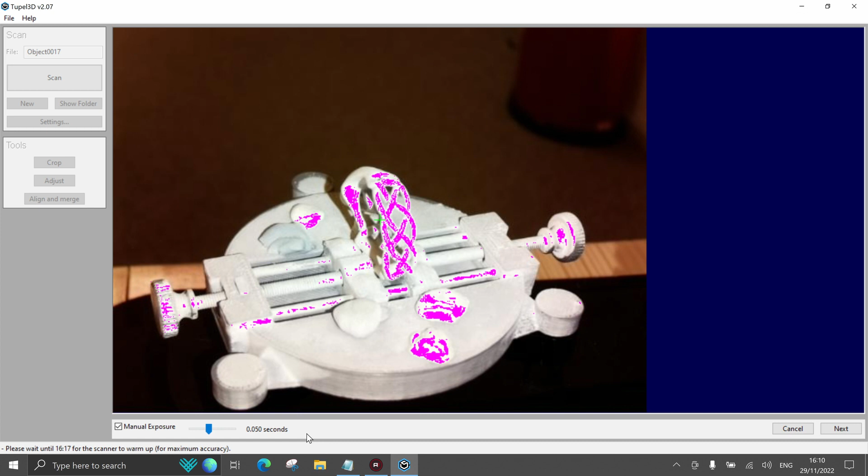So as you see, there's a lot of purple-red color, which indicates that you've brought the brightness too high. So using the arrow up and down on the keyboard, or with the mouse, you can bring your brightness down. You try to achieve the maximum brightness possible, but without noise.

So if you leave it like this, everything that's purple around won't be fully scanned, so you try to adjust it.

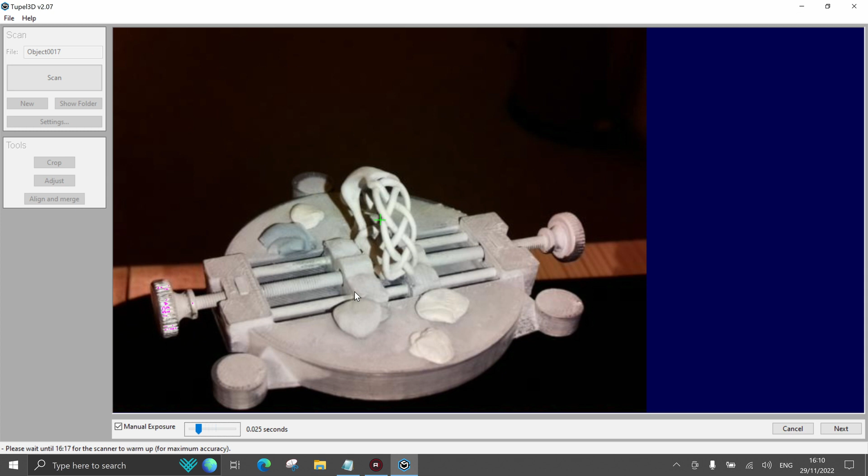Now you can rotate it the same way. You can check if you sprayed your ring well, so we can see it's all nice, and then you press next, and we're going to wait for the scanning process. It takes about 4 or 5 minutes.

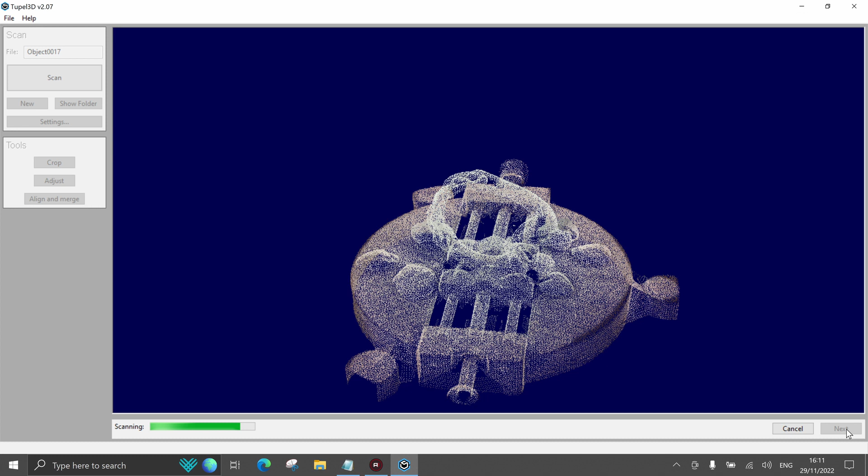So now, as you see, the scan was done pretty fast. While it's processing, you can already rotate the ring to the other side and prepare for scanning the other side.

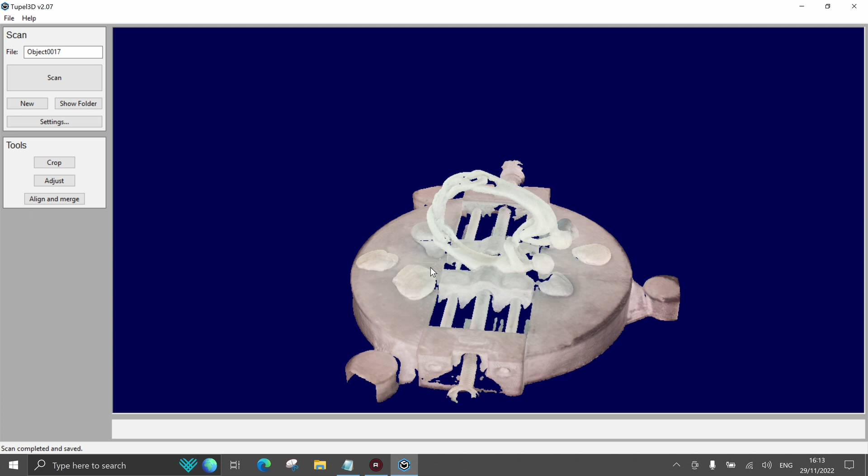So after you scan your object, you need to go to crop. You have two options: keep selection or remove selection. I'm going to use remove selection for our purpose, because for this interesting shape of ring, it's good to keep most of the data, so I'll try to keep this part as well.

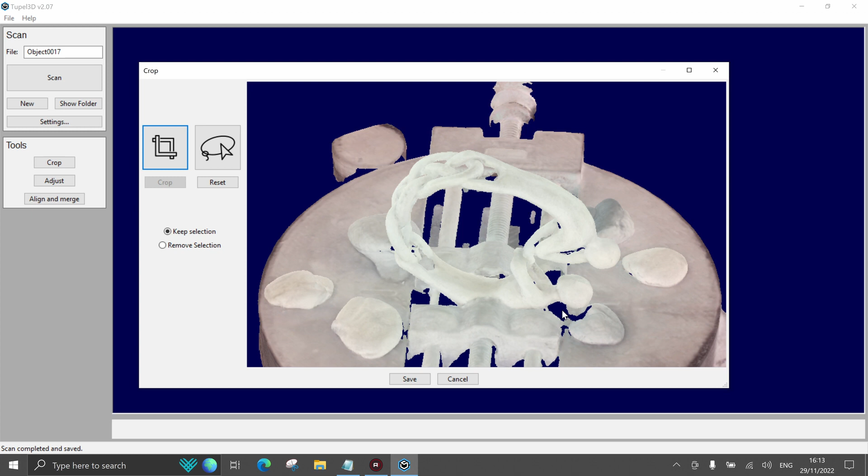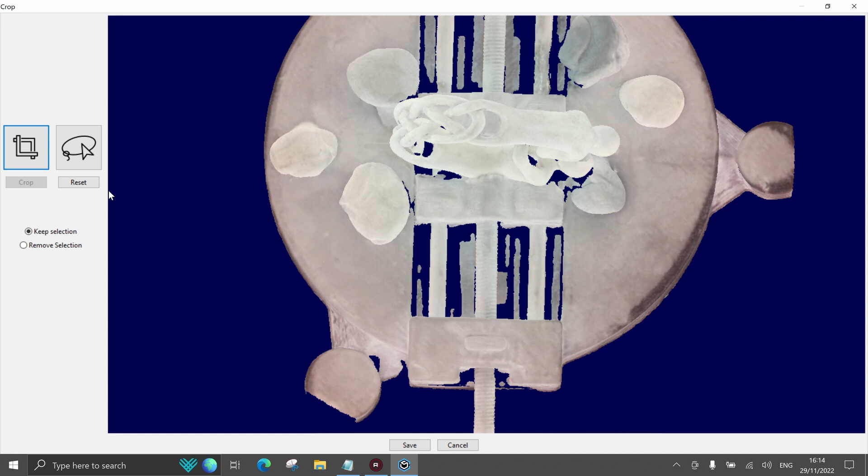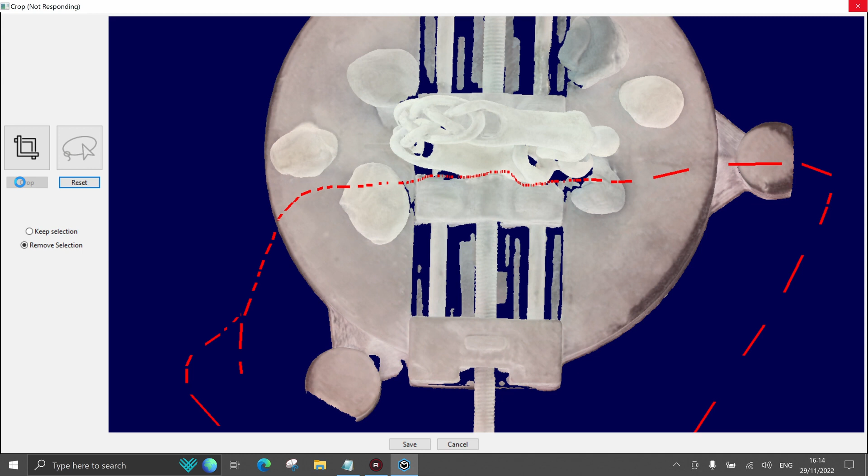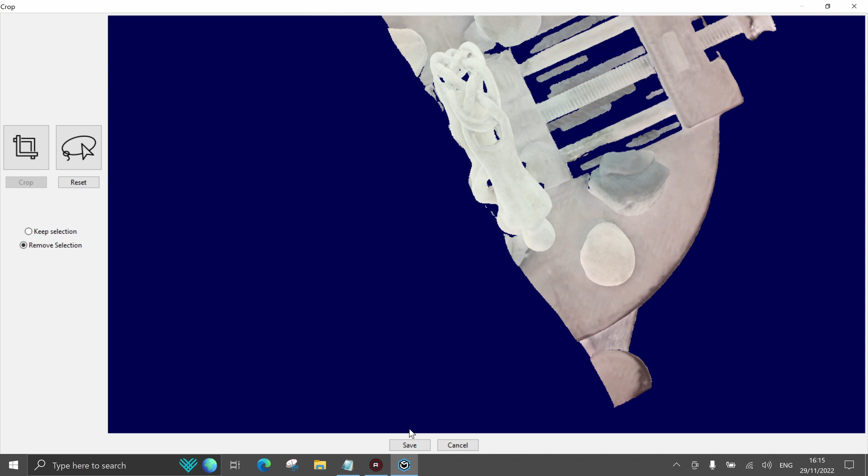It sometimes happens, like now, that part of the window disappears during processing. We're dealing with a small error, but this screen is here, so it's enough to click on any white window here, and you'll have your scan back.

So we're doing exactly the same with the second part: remove selection, highlight, going around here, and crop.

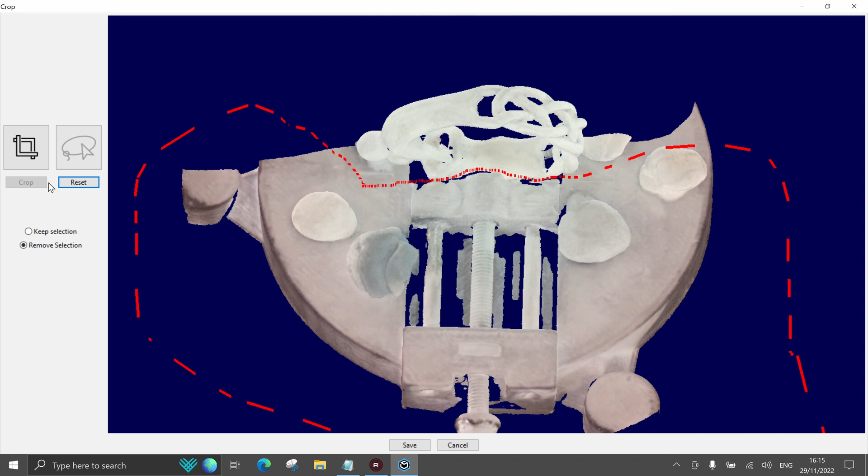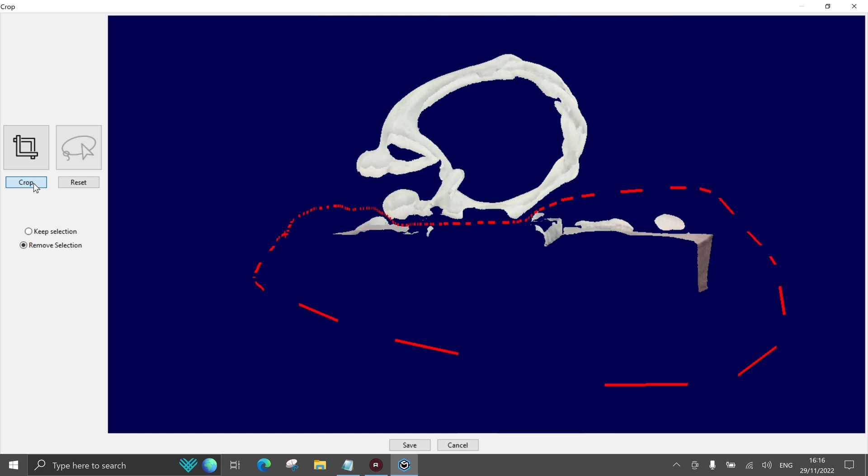We have a lovely scan, press save. In post-processing, I recommend sometimes there's a little bit of floating noise in here, so you adjust the floating noise removal. Just press apply, and all the small noise around the scan is going to disappear. Then you press save, and one part of the scan is ready.

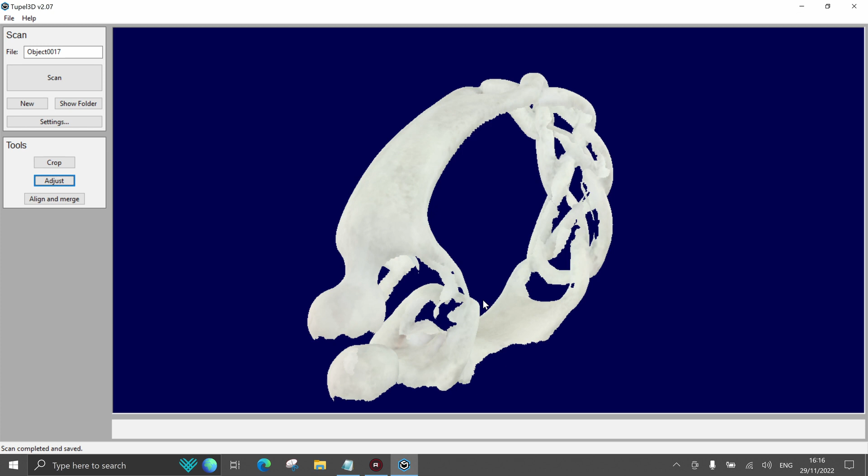So for the second part, we just rotate the scanner and do exactly the same. When it's ready, we're going to align and merge, and you add the second scan. I've already rescanned the second one, so we can continue.

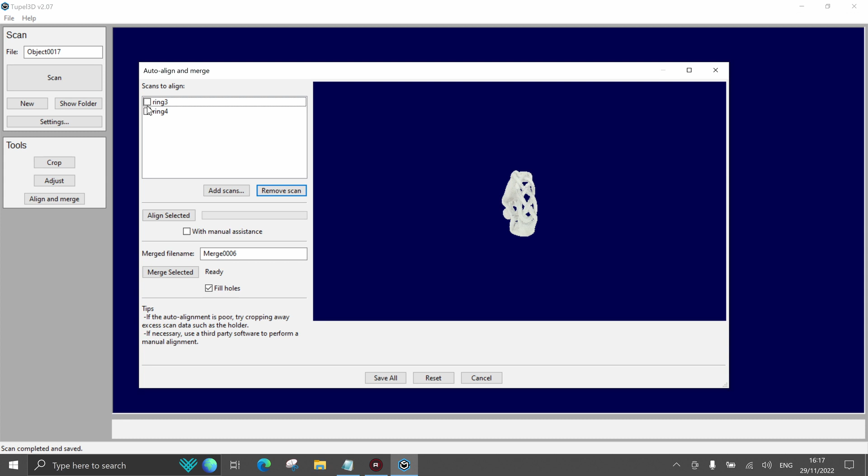Wait a few seconds. Like you see, it's aligned the ring. You can also make this screen bigger. So the alignment is done pretty well, the most important thing is that one shape is close to the other.

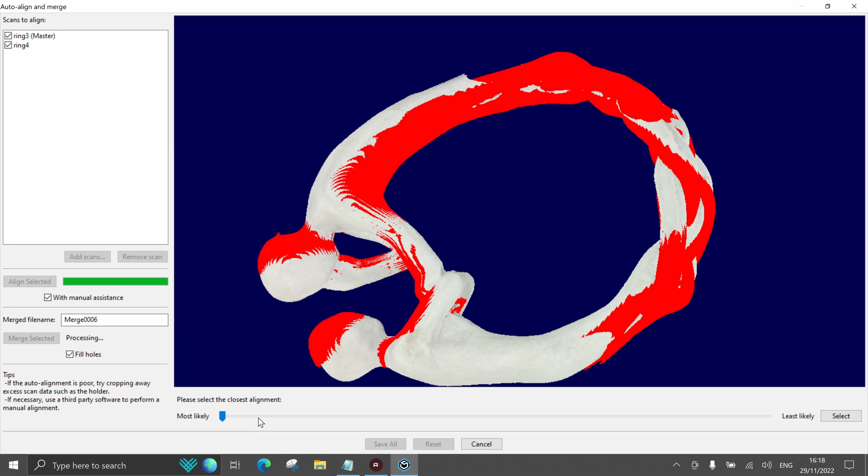But if you're not happy, you can move the bar and try to adjust it more accurately, like this one - you see, you just bring it even closer, second part to another one, and keep moving so you can have different options if selected. For our purpose, this second one is the best.

You go around, then you click select, so it's going to adjust the rings.

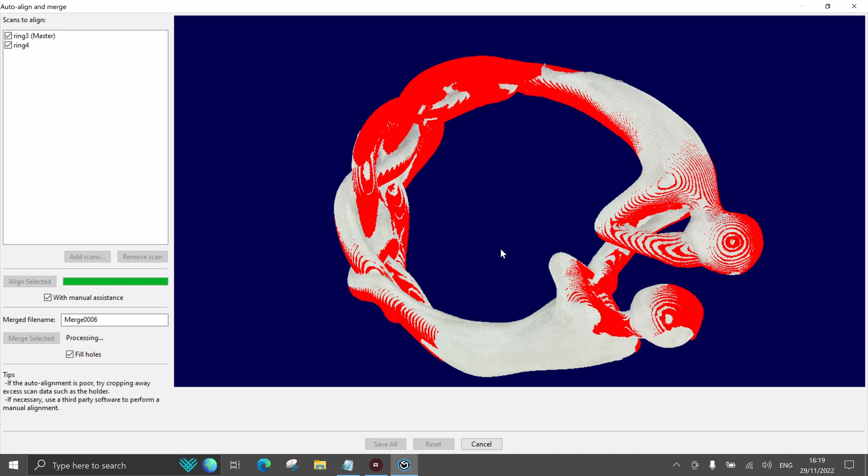Now, I have a few people asking me about confusion here. If you press save all now, it's not going to create one ring - it's going to save these two scans, the previous scans you worked on, as a separate group aligned together. So you need to open and do create and merge together.

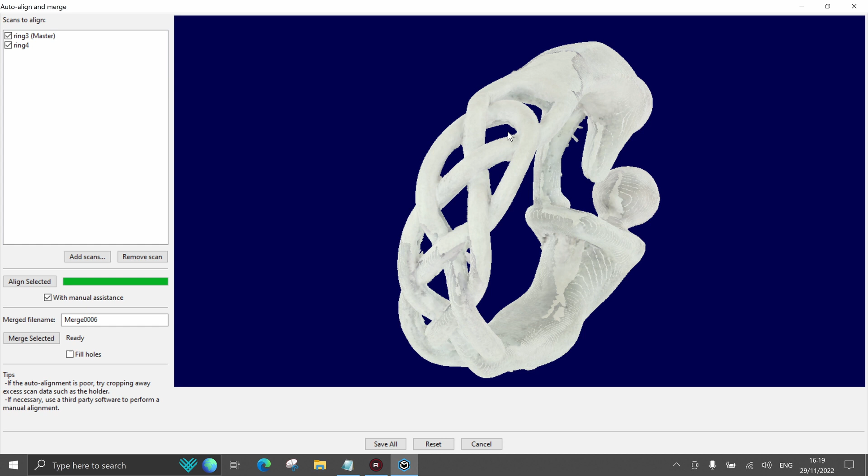In here you have the option to merge selected. When you're doing a ring, please untick fill the holes, because for rendering or design purposes you'd probably like to keep this hole open, and later in post-processing, if you see the scanner didn't scan properly, you can close the holes.

And here you can name it full ring or merge ring, whatever you like - full ring, or merge, or full ring one, whatever you prefer.

Now you click merge selected, and it's going to create another scan on the side. So it's the merge ring, two scans together - you're going to get basically three scans: the first group, the second group scan, and the full ring when it's merged, two rings together.

Now for alignment, you can see it's created the full ring, and now we can save all.

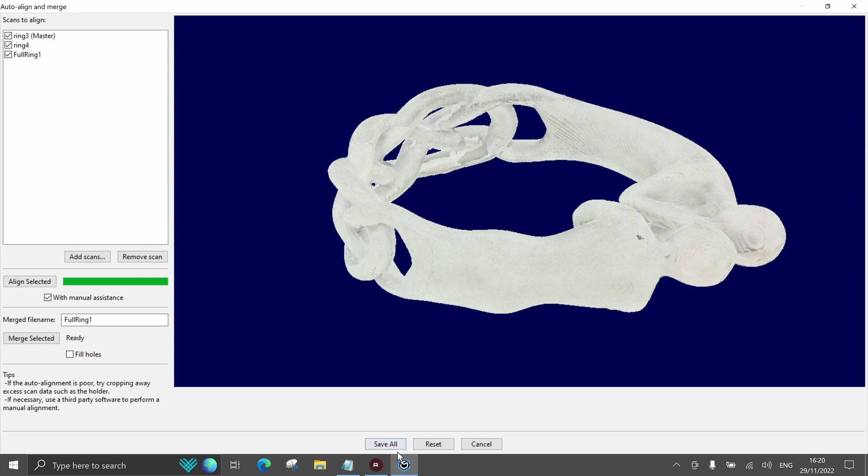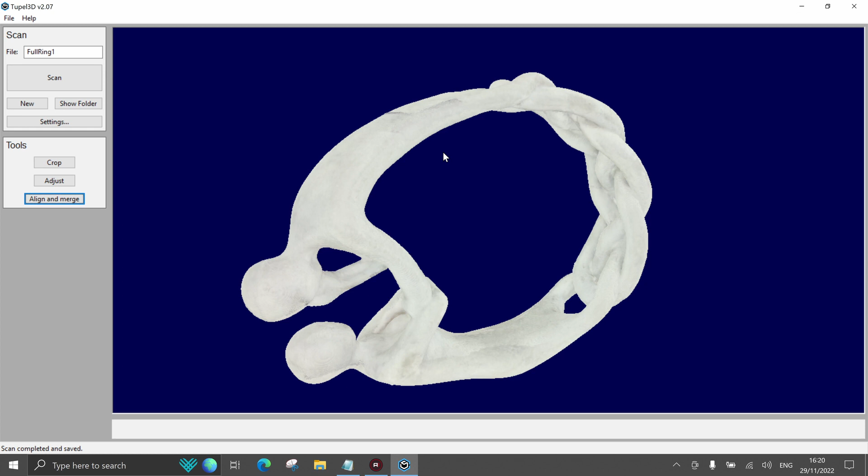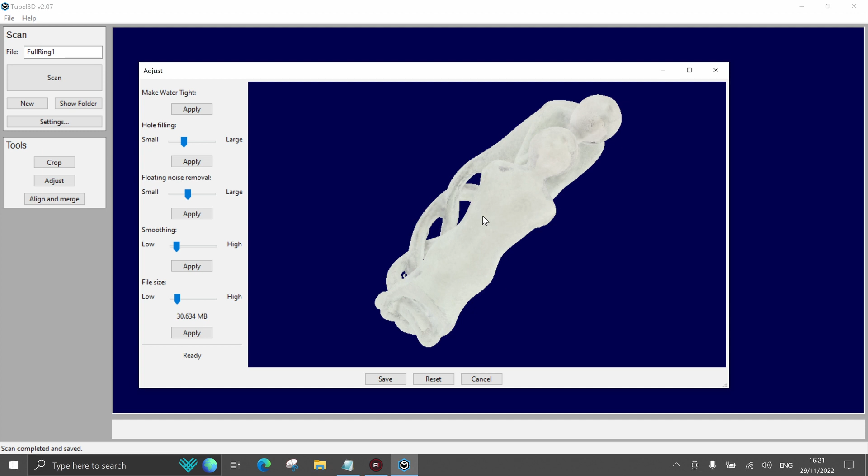To close more holes, apply to the small holes, and the same with the floating noise around, again you can do that. And the same, you can make this file smaller or bigger depending on how big the file is. For example, you can compress the file to halfway smaller, because for an STL file you don't need such detail - it depends if you'd like detail for rendering or for printing, so you can make this file a little bit smaller.

Takes a small while, just to show you.

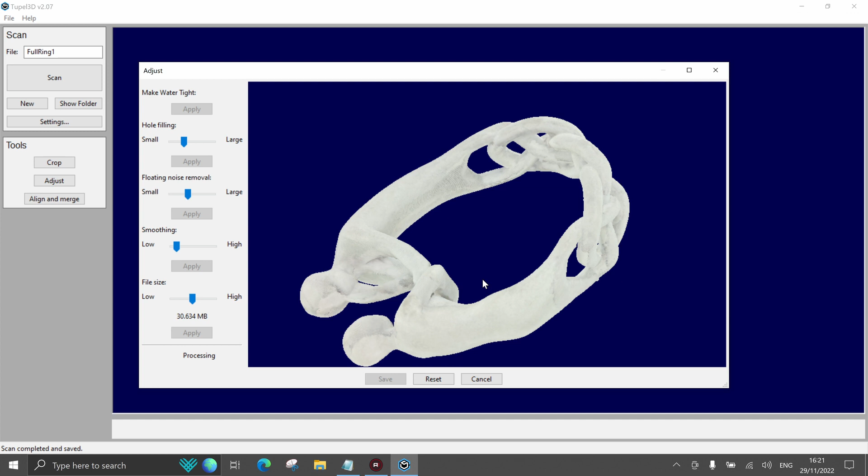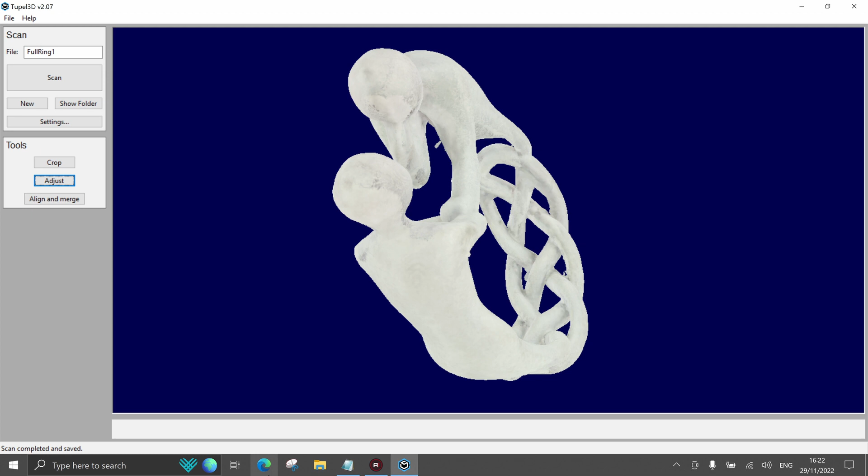Now you can press save, and from this file you just go to file, save as, choose STL file, choose where you'd like to save the STL file, or go a different way. I'll go with the same name, press save, and just to show you how the file looks - you go here, and in downloads you get the STL file, 28 megabytes, so halfway as usual, a normal one.